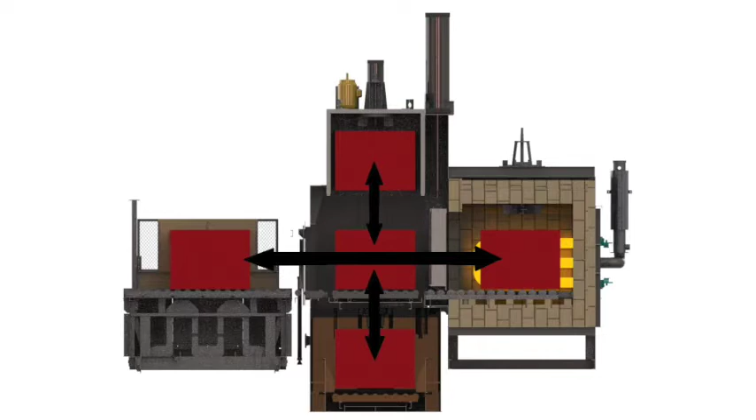Although most furnaces manufactured today include internal handling systems, older furnaces and some still manufactured today use charge car handlers to transfer loads from the furnace chamber to the quench elevator.

All motions were controlled by operator push buttons. This included opening the vestibule and furnace door manually, and charging the load with the charge car handling system manually. Load quenching was also performed manually with the charge car handler. This could result in varying furnace-to-quench times depending on the speed of the furnace operator pressing buttons and actuating handles.

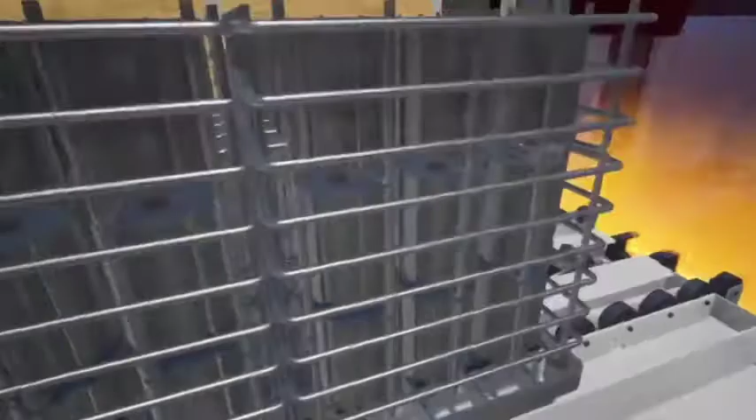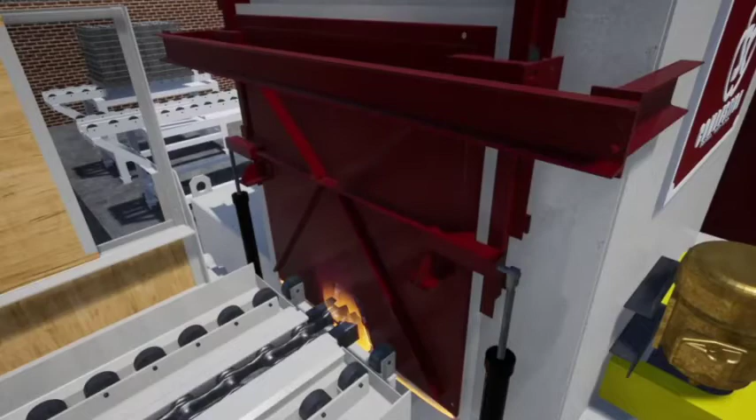As the video plays, you see the charge car pushing the load into the vestibule. Once the load stops, the vestibule door must close before the next motion is initiated. The operator will often wait a moment to assure the atmosphere stabilizes before opening the furnace door. At this point, the operator opens the furnace door and moves the workload into the furnace chamber before retracting the charge car handler and closing the furnace door.

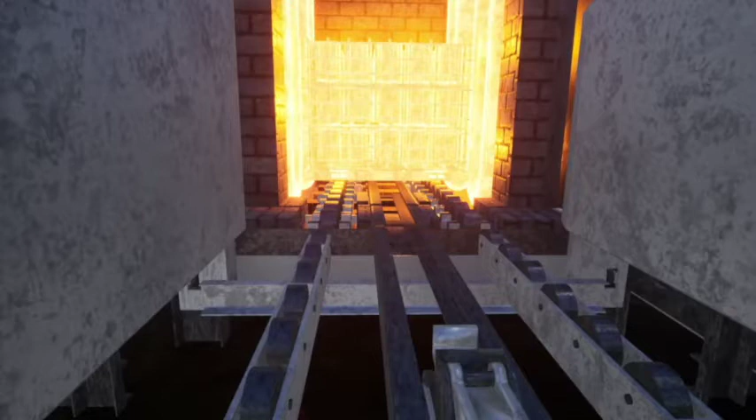At the conclusion of the heating cycle, the operator will manually open the vestibule slot door and the furnace door, and use the charge car handler to transfer the load from the furnace to the vestibule elevator for quenching. The result was a slow, non-repeatable quench time and inconsistent material properties.

The inclusion of the rear handling system allowed the internal motions to become part of the program cycle. This was a progressive step in automation development. The furnace operator's only responsibility was to place the load into the vestibule and start the cycle. Relays and timers would actuate the door and rear handler to transfer the load into the furnace, back into the vestibule, and down into the oil quench.

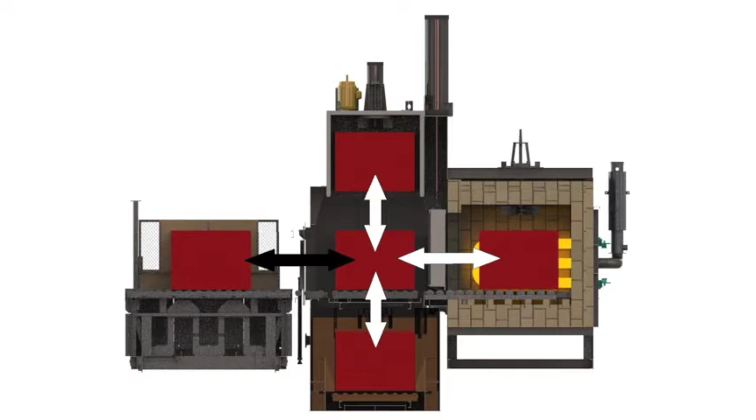As this video plays, we pick up with the load in the vestibule ready for transfer into the furnace chamber. The furnace PLC is controlling the mechanical motions and has already opened the furnace door and initiated the rear handler motion to pick up the tray with the workload. As the load stops in the correct position, the furnace door close motion is actuated.

At the conclusion of the heating cycle, the PLC will signal the furnace door to open. Once opened, the rear handler will push the workload onto the quench elevator and retract into the home position. At this time, the furnace door will close and the quench elevator will lower into the oil. The programmed movement provided repeatable furnace-to-quench times, improving part quality and consistency.

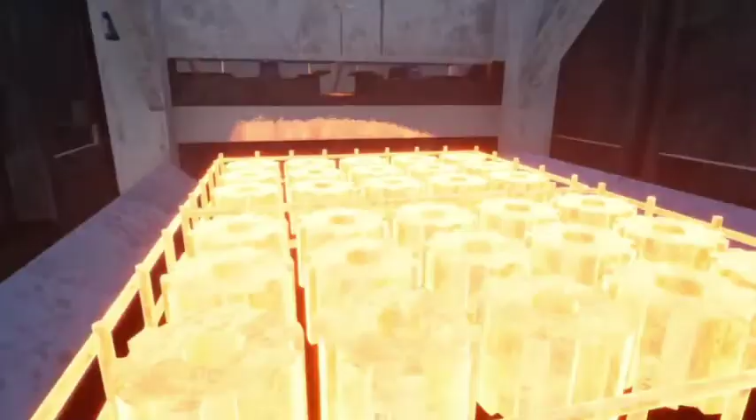Further advancement in controls replaced the timers and relays with PLC hardware and software.

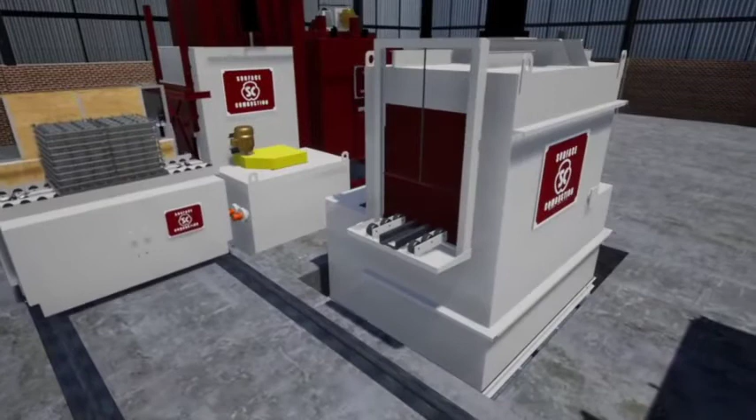This presentation will focus on the next level of automation, which includes an unmanned charge car delivering loads between the heat treat equipment components, including BIQs, temper furnaces, washers, tables, and other components.

The programmed automation includes setting a path for the load to be processed from beginning to end. The plan would also include recipes for each step in the path, which may include pre-washing, preheat, carburizing or hardening, post-wash, and tempering. Once the path and plan are in place, the smart charge car will deliver the workload from step to step without the need for human interaction.

Implementing an automation system will affect your business in many positive forms, including reducing the risk of accidents, improving quality control, increasing production, and optimization of manpower.

Discussing automation should also include some initial discussion of controls and the layers in the automation pyramid. A typical automation pyramid for industrial applications includes a field level, a control level, a supervisory level, a planning level, and a management level.

On the field level, we find devices connected directly to the processing equipment. The field level includes sensors, actuators, valves, and any other device used for controlling the equipment or collecting data from the process. Thinking back to the handling systems, the furnaces built 60 to 70 years ago operated on the field level only. There were no programs and no second level of automation.

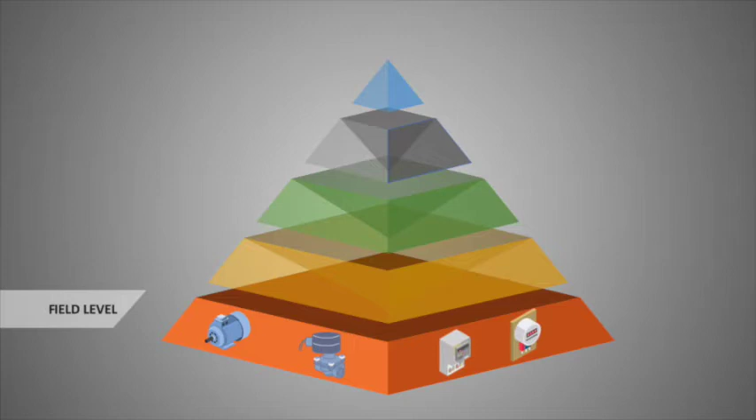The next level is the control level. This would include PLC hardware and the software program. The interaction between the field level and the control level allows mechanical motions to occur along with the process control of temperature and atmosphere to create complete thermal recipes.

The marriage of levels 1 and 2 is an improvement similar to the addition of a rear handler on a BIQ. It makes processing repeatable from one load to the next.

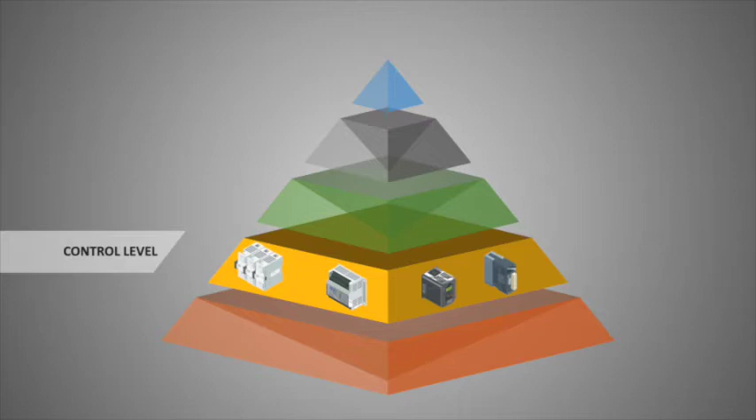The third level up is the supervisory level. This includes supervisory control and data acquisition, also known as the SCADA system. Anyone in the heat treating industry knows SCADA systems are a must, as industry standards such as CQI-9 and AMS 2750 require strict record keeping of process-related data.

A non-automated batch integral quench furnace line would include the bottom three levels of the automation pyramid.

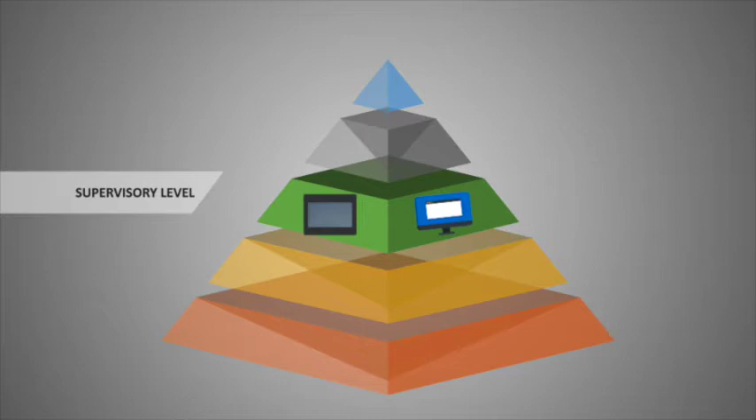Adding automation to a batch integral quench furnace line includes the 4th level in the pyramid and ties the bottom 3 levels of the pyramid together.

As we mentioned previously, the automation includes a plan for the entire thermal treatment from preheat all the way through the temper treatment. Once programmed, the plan is executed while capturing the data and process parameters throughout each step.

This includes data collection from instruments at the field level, tying them to a load recipe run in the control level, and transferring the information to the SCADA system.

This allows a heat treat facility to plan and provide a reliable, repeatable process flow of work while capturing all records along the way.

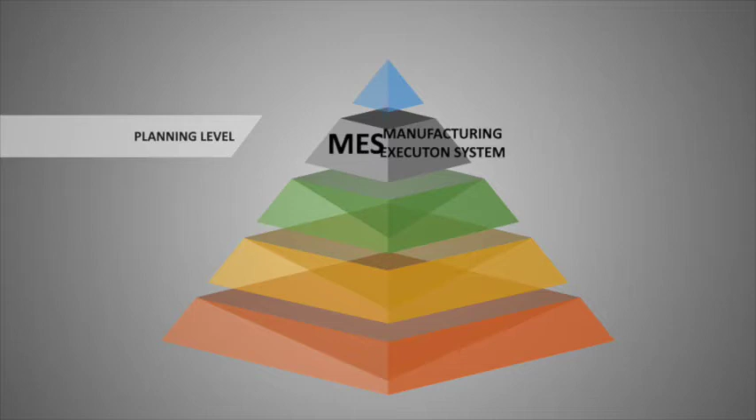The top level of the automation pyramid is the management level ERP system.

Although this is not part of the conversation today, the next step and long-term goal would be to tie the automation system into a plant-level ERP system.

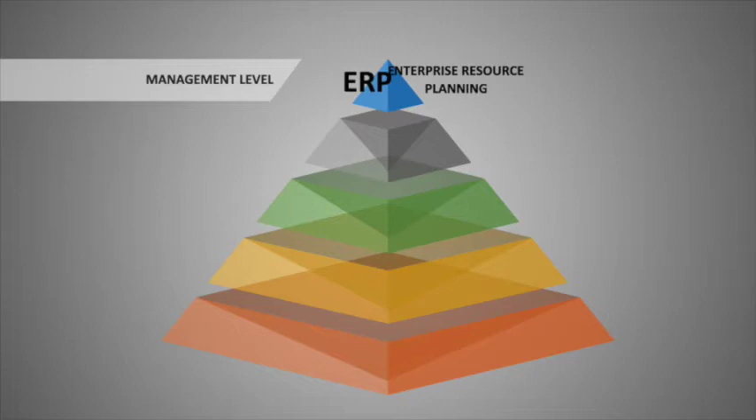Now that we have reviewed the handling systems in the automation pyramid, we will focus on the advantages and improvements automation will bring to your facility.

Number one on the list is safety, as safety should always be in the forefront of any manufacturing facility manager's mind.

The National Safety Council estimates work injury cost and time lost equal to $170 billion in 2018.

Accidents requiring a medical consultation cost an average of $41,000 per person, while the cost for a life was found to be approximately $1.1 million.

There were 70 million man-days lost in 2018 due to injuries.

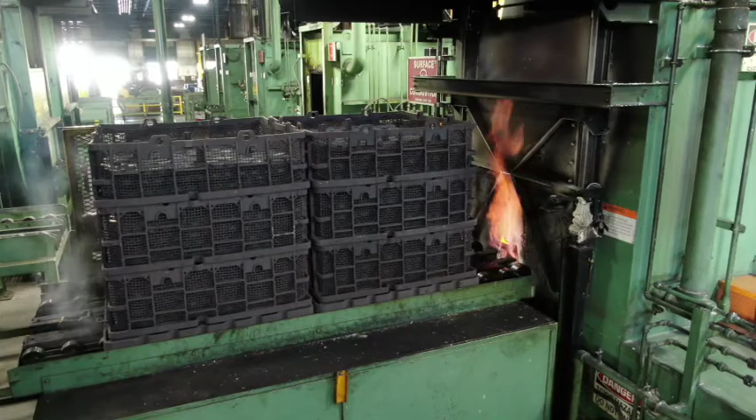Removing humans from areas of risk reduces the chance of injury. In a heat treating environment, eliminating the need for workers in the furnace area and eliminating the need for an operator to load and unload the furnace greatly reduces the chance of an injury or accident.

Pressure fluctuations, load transfers, and even the basic loading and unloading of a BIQ furnace requires awareness and education to avoid missteps and accidents. The cost of one serious accident involving a worker is greater than the cost to include automation in the next batch integral quench furnace line.

The second major improvement that can be achieved by including automation is quality control. An automation system will allow the heat treat process plan to control the workload from entry to exit.

The following is a report generated from an automation system installed in 2014 and still running today.

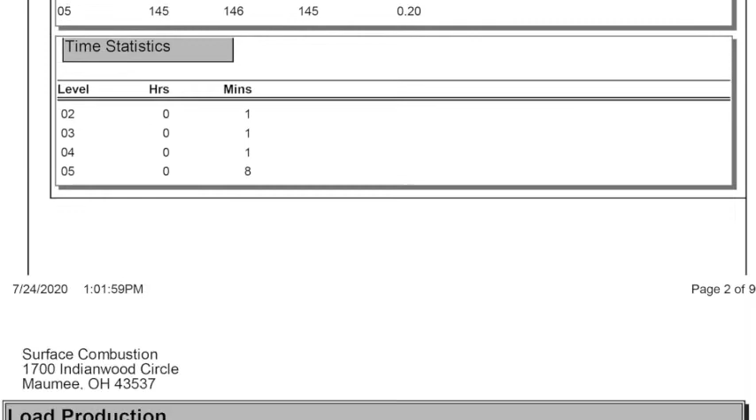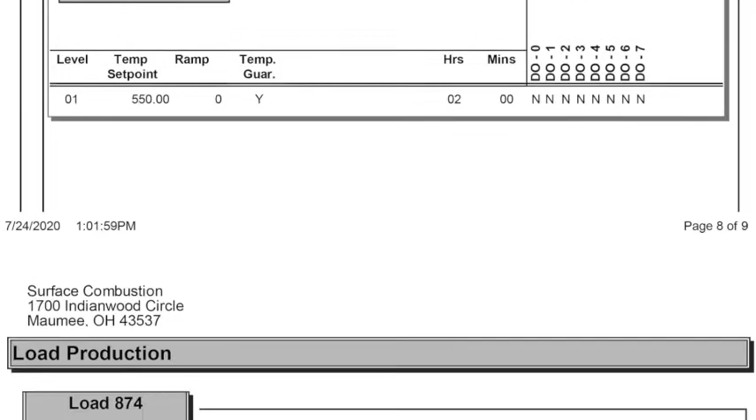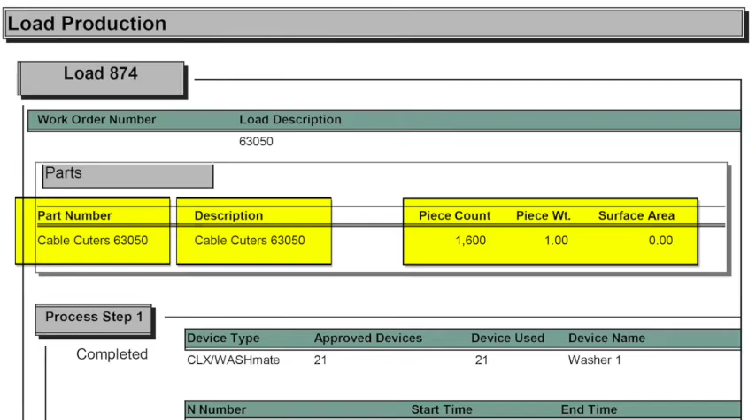Working with a SCADA system, a complete load production report lists the part number, description, and other information as the workload tracks through the heat treatment.

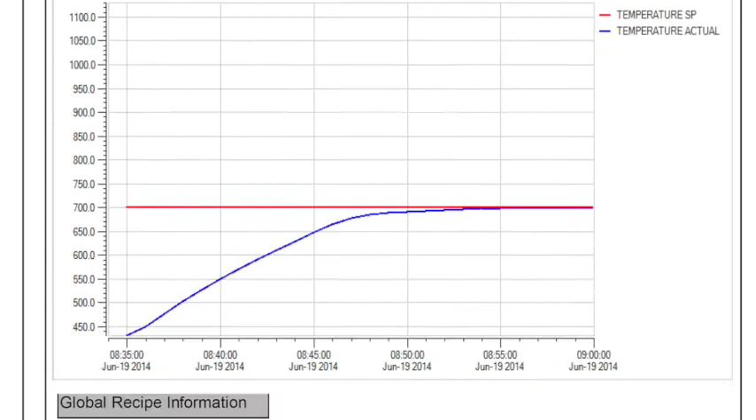In this case, a workload was washed in washer 1 and then sent to draw 4 to be heat treated to 700 degrees. All timestamps, temperature statistics, and alarms are recorded for future retrieval.

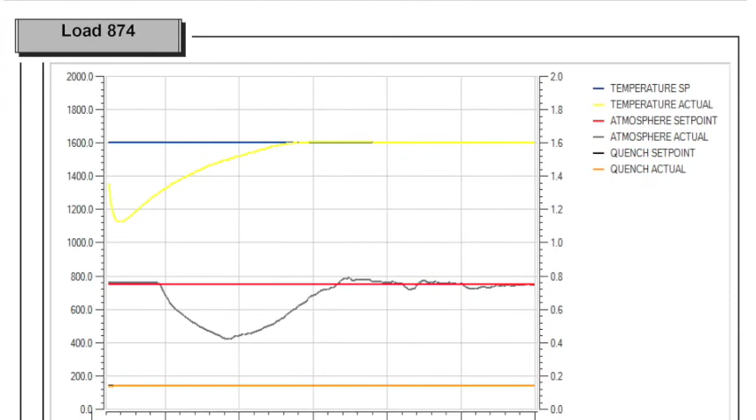The load then transferred to all-case BIQ furnace 3 for further heat treatment, again recording all process data, including temperature and atmosphere graphs. The load continued on through a post-wash, inspection, temper, and rust-prohibitive dunk tank.

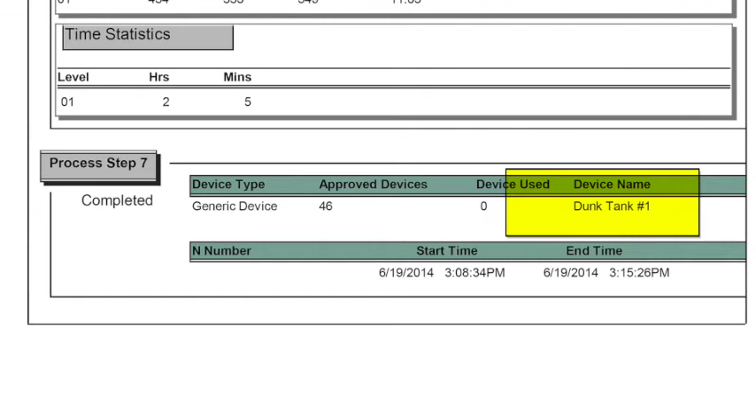At the conclusion of the heat treatment, a report can be generated with all of the critical data captured in one place. Metallurgical data, process, and load sizes can also be input into the report.

No steps will be missed, and no recipes will be misentered in the individual controllers.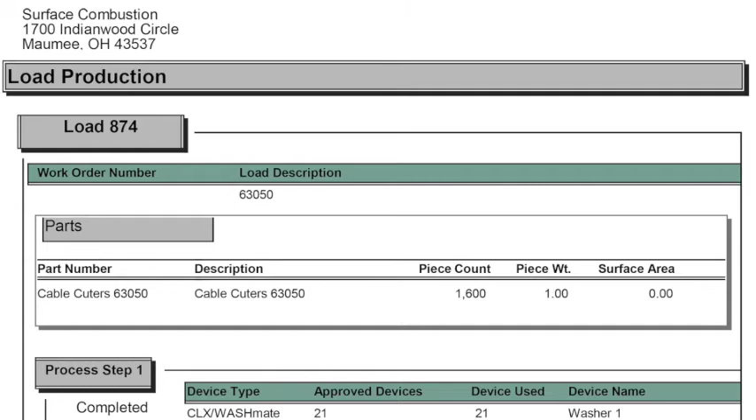Another advantage of automating a furnace line is increased production. Much of the drive to automate furnace lines was done by captive heat treating shops, processing the same loads over and over again.

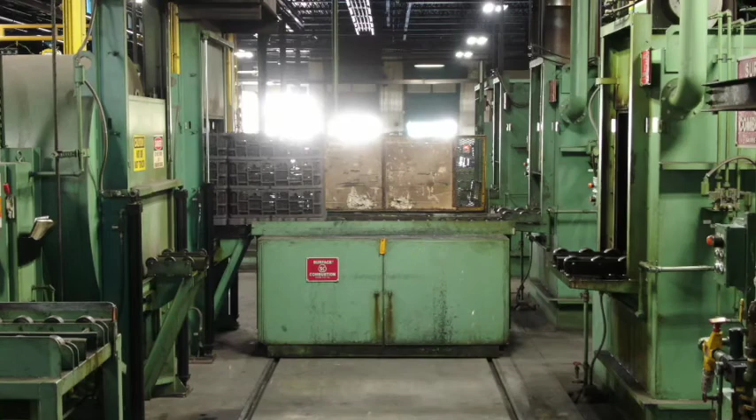Automating the process allowed for optimum production while reducing the manpower required. The production advantages can be realized at the commercial heat treat facilities as well.

With an automated charge car, idle loads are eliminated as the loads are transferred as soon as the next piece of equipment is available. No more waiting during shift changes, bathroom breaks, lunchtime, or smoke breaks.

Workloads can be built up and staged for multiple furnaces and process steps. A first shift workforce can provide enough stacked loads to run through skeleton crews in the second and third shifts.

The 10-minute smoke break, plus the 15-minute shift change, plus the 5-minute bathroom break can add up over the course of a day or week.

The additional time gained can result in an additional load making it into the furnace, providing extra income in the long run.

One extra load per week over a 50-week work year is enough to pay for the automation.

Another advantage achieved by automating a batch integral quench furnace line is the optimization of manpower.

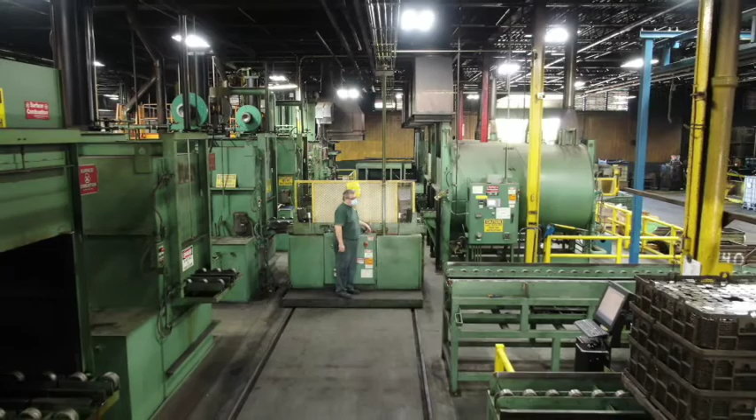Time once used in moving workloads from one piece of equipment to another can now be used to build more workloads, perform routine maintenance, part testing, or other required tasks.

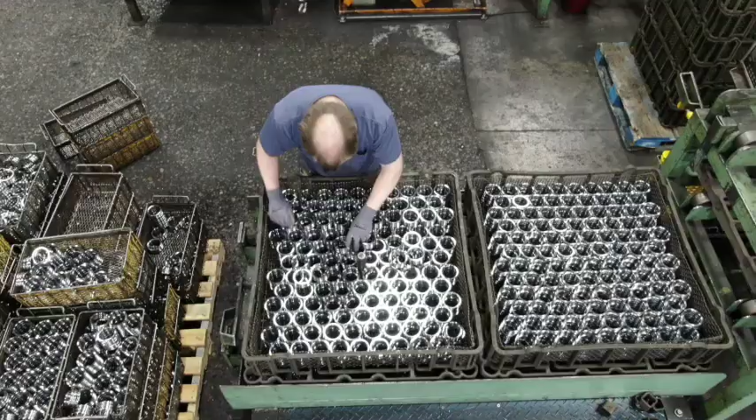The skill set of a load builder may not be the same skill set as a furnace operator or the supervisor of the area. Automation provides a tool to optimize the talents of the workforce and time available for the task required to run production.

Whether you are looking into automating your BIQ line or not, the advantages achieved by doing so should be considered. Making your facility a safer environment to work in will prove to be more profitable in the long term by avoiding costly accidents.

Allowing the programmed automation system to control the path and recipes of the entire thermal process while capturing all data required by your customers should be the ultimate goal of quality control.

Utilizing your equipment to its fullest extent with the greatest production utilization means maximizing the profit available from your equipment. These subjects, along with the optimization of manpower, can be achieved more easily with the implementation of automation on your batch integral quench furnace line.